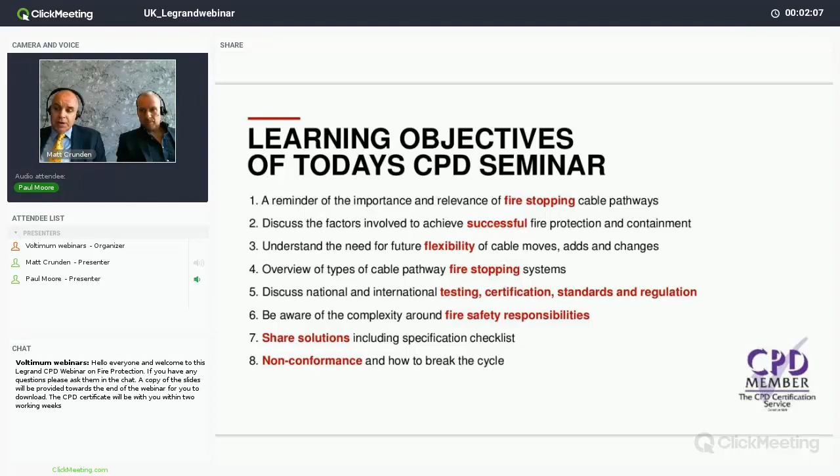The agenda points are shown here, and we'll be talking about quite a broad number of subjects within the seminar, such as fire safety responsibility, cable moves, adds and changes, and a whole host of other things besides.

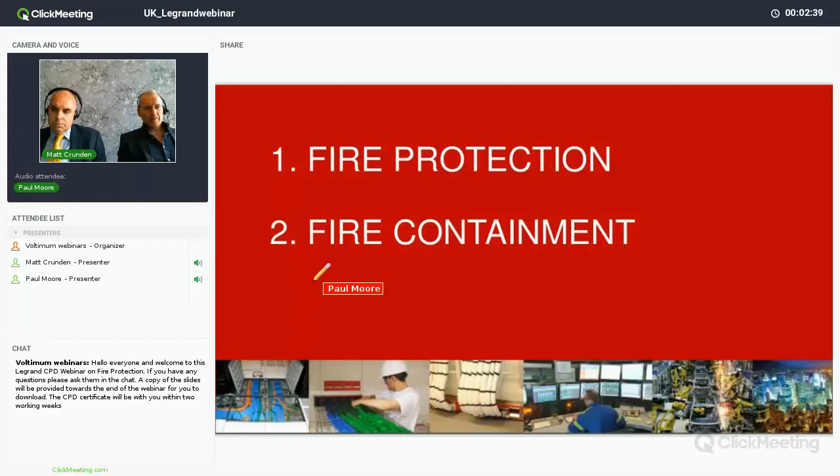We'll start off with sections 1 and 2, fire protection and fire containment. Paul, could I ask you please to give an overview for us of fire protection?

Yes, of course. Fire protection has 3 critical factors. Number 1, prevent: the selection of non-flammable building materials such as bricks, steel tubing and the like. Number 2, extinguish: once a fire is present, the actions required to extinguish it. This is known as active fire protection. And number 3, contain: to prevent the fire from spreading from one building compartment to another. This is known as passive fire protection.

Excellent, Paul, thank you. Could you just briefly elaborate on the terms active and passive fire protection? Active fire protection includes items such as bells, sprinklers and extinguishers, things that require motion and response. Passive fire protection, on the other hand, uses a barrier method, such as a fire door or a penetrating pathway.

Let me quickly explain compartmentation too. The basis of compartmentation is to subdivide buildings into areas of manageable risk, which provides an adequate means of escape, but also provides fire separation for adjoining buildings. Compartmentation is in fact referenced within the Building Regulations Approved Document B for fire safety. In essence, for a building to function, services need to pass through fire-rated barriers.

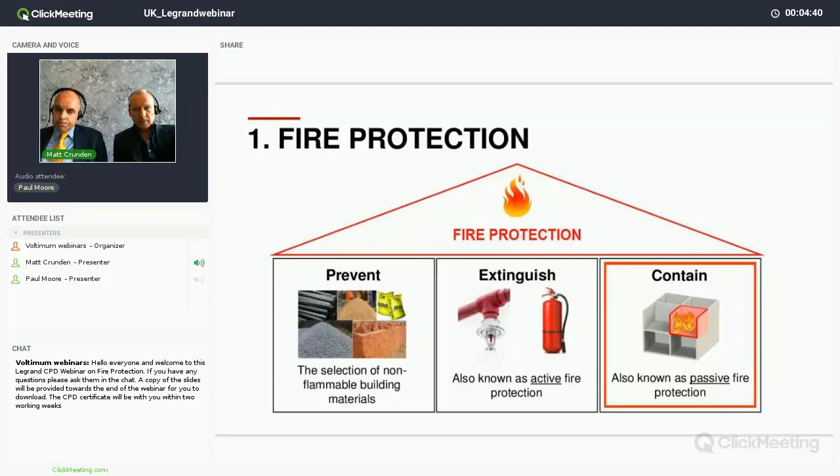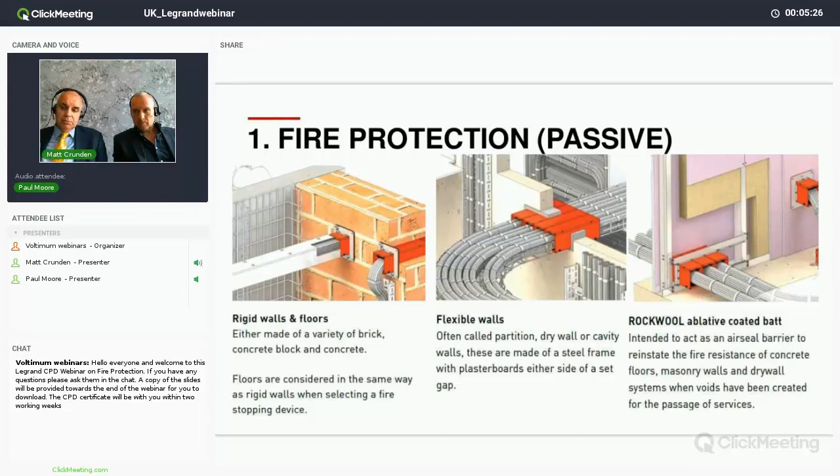Right, thank you for the explanation on that, Paul. However, before choosing a fire-stopping device, it's vital to understand the requirements of the building it will be installed in. Firstly, it's important to be aware of the construction of the building and the areas within it. This is easier with a new build, as walls etc. are shown on drawings or within a model, but it can be a little more complicated with existing buildings. The type of wall or floor used has a bearing on the fire stopping device that you can use and will determine the fire rating, for example, 30 minutes, 60 minutes, 90 minutes, or 120 minutes.

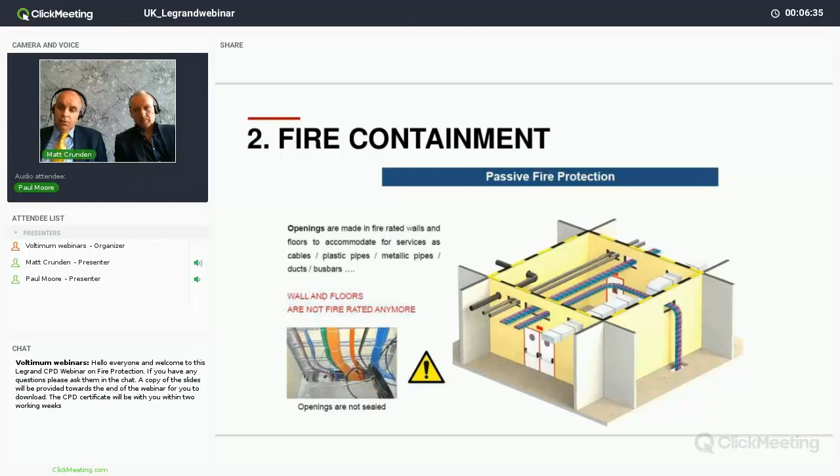Okay, so in terms of the openings in the walls and the floors, how do we restore the resistance of these walls and floors?

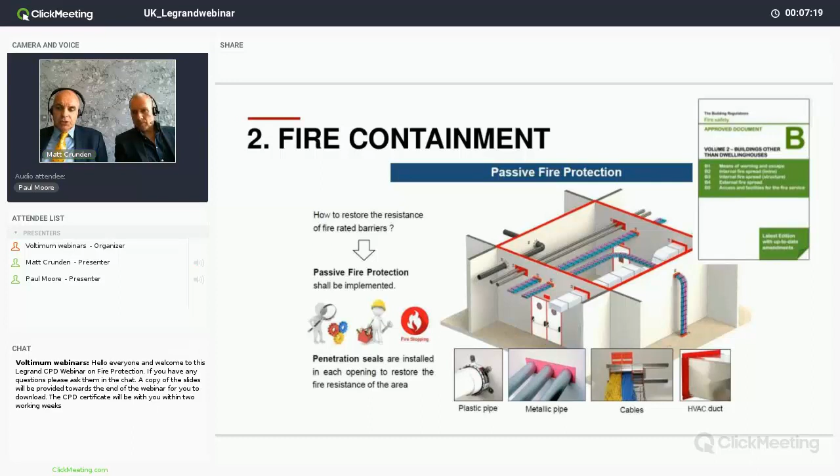With the use of passive fire protection materials in accordance with Building Regulations Part B, section 10.2, which states the following: if a fire separating element is to be effective, every joint or imperfection of fit or opening to allow services to pass through the element should be adequately protected by sealing or fire stopping, so that the fire resistance of the element is not impaired.

Using passive fire protection methods ensures that in the case of fire, the fire barrier or penetration seal stops the flames, smoke and gases from progressing to other areas. Fire is contained, the building is safe.

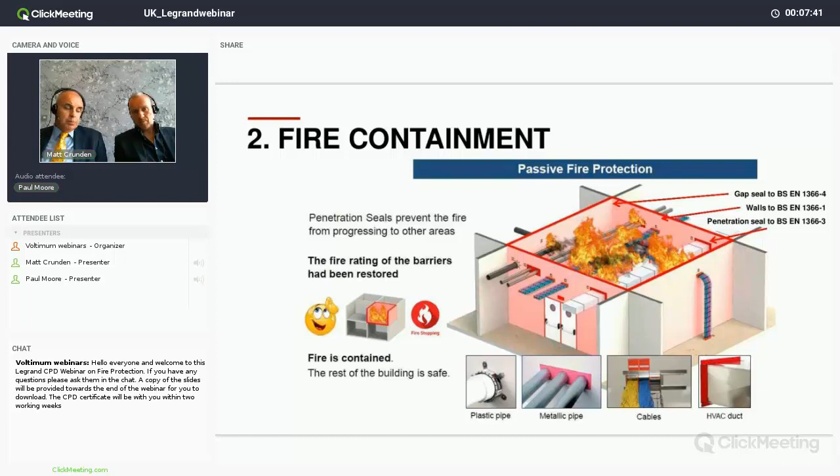We need to ensure that we eliminate the use of incorrect products, mispenetrations, or incompetent people installing fire stopping, because this allows fire to spread quickly to other areas as the fire barrier will have lost its resistance. If openings are not sealed, fire can progress to other areas.

According to the Association of Specialist Fire Protection, fire will spread from one compartment to another in under 4 minutes through a hole no larger than a pencil. Well, that's a frightening statistic.

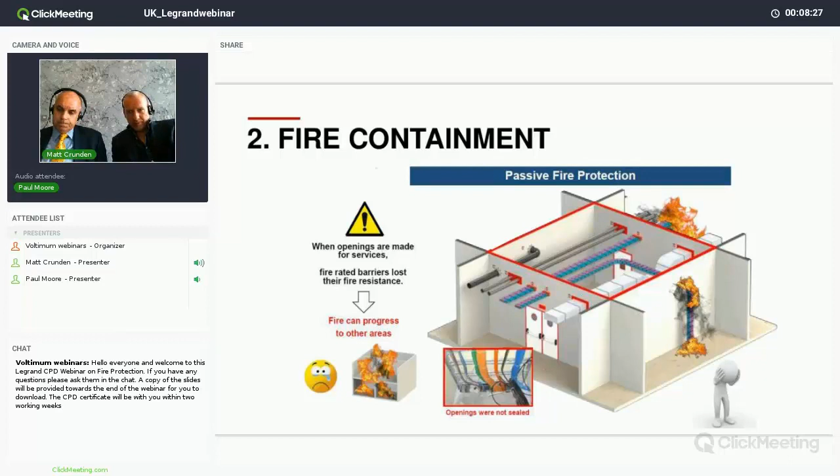Excellent, Paul. Thank you. Let's move to section 3 and we'll talk about fire safety responsibility.

In October 2017, the Royal Town Planning Institute, a not-for-profit organisation representing 23,000 planning professionals working worldwide in the public, private, charitable and education sectors, put together a short briefing to clarify who is responsible for what in England. The Building Act 1984 tasks building control with securing the health, safety, welfare and convenience of persons in or about buildings and of others who may be affected by buildings or matters connected with buildings. This includes fire safety. Fire safety is part of building regulations, so building control plays the main role in approving fire safety in developments.

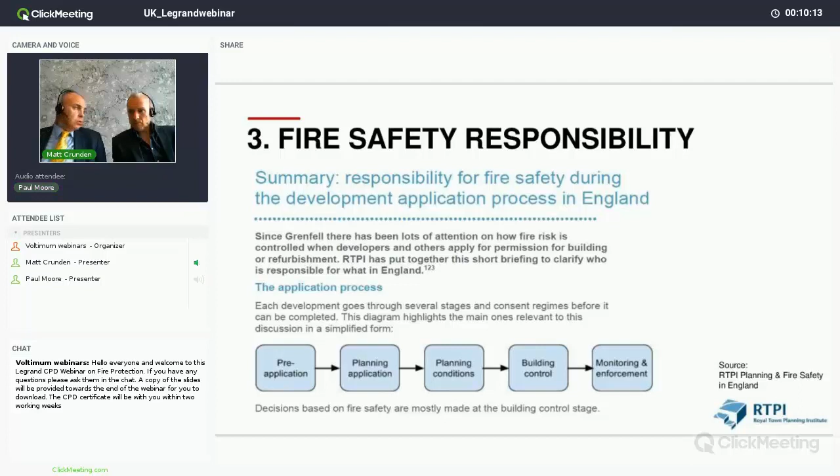However, whilst legal responsibility for assessing fire safety during development lies with building control, other systems, including planning, have roles to play too. The document sets out the respective roles and limitations in scope of each key player in this process, starting with planning. Note, this is advisory only and should not be taken to constitute legal advice.

Okay, so let's briefly examine Dame Judith Hackitt's review of the building regulations, which was ordered after the Grenfell Tower disaster and has found the system, to quote from the report, 'not fit for purpose.' Yes, Dame Judith Hackitt's interim report into building safety has called for an overhaul of the construction industry to put safety above cutting costs. This interim report will be followed by a full report, including her recommendations, expected in spring 2018.

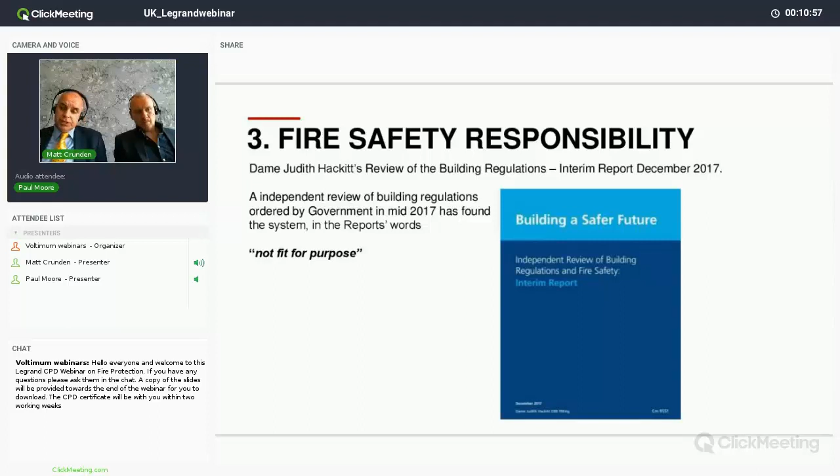Matt, look at this map and tell me what you see, if you can see it. Oh, I see a very complex mess. And I, for one, having actually spent some time trying to understand this, have failed.

Exactly. You don't need to see the slide or understand what's on it, but the map highlights the building and fire safety regulatory regime. This was produced in Appendix D as part of Dame Judith Hackitt's interim report in December 2017. You do not need to read the text or fully understand it. I just want you to contemplate the complexity of the existing regulatory system she has identified.

The purpose of the independent review of building regulations and fire safety is to make recommendations that will ensure we have a sufficiently robust regulatory system for the future, and to provide further assurance to residents that the complete system is working to ensure the buildings they live in are safe and remain so. It is examining the building and fire safety regulatory system with a focus on high-rise residential buildings. This interim report provides the findings to date and directions of travel for the review, ahead of a final report expected later this year.

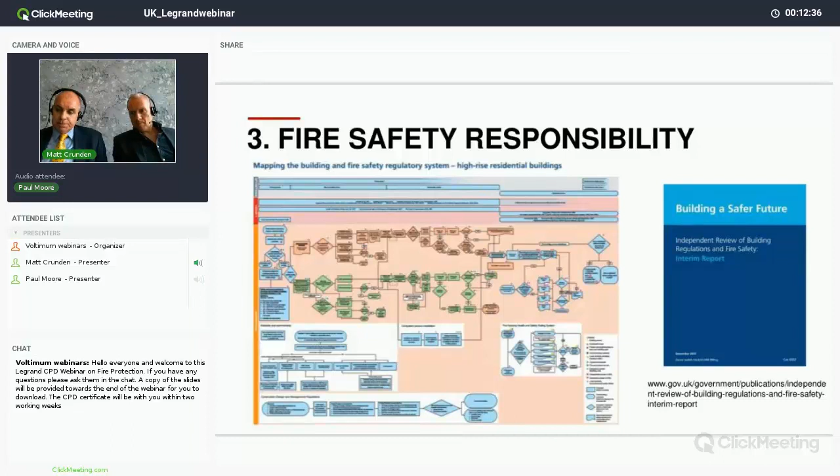Thank you, Paul. So let's move to section 4, cable moves, adds, and changes.

Okay, so Paul, I have to ask you, other systems we know pass through walls and floors. So why should the fire stopping of the CMS system, the cable management system, be considered separately from other systems? Good question. Because unlike pipe or ducting, the cables on a cable support system can provide a source of fuel to propagate a fire and can also release toxic smoke and gases.

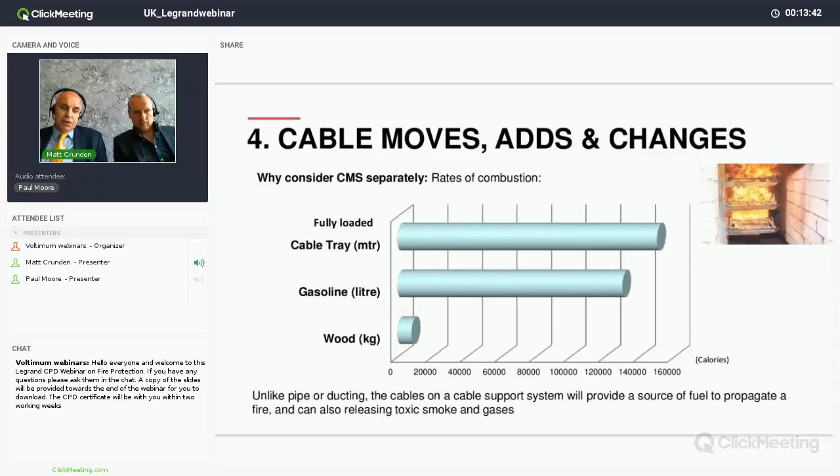You can see from the graph that a rate of combustion comparison between 1 metre of fully loaded cable tray, 1 litre of gasoline, and 1 kilogram of dry wood is not at all favourable for the cable.

Due to cabling being such a good source of fuel, passive fire protection is a critical factor in any electrical, data, telecom installation. Because expansion of electrical or data infrastructure in a building is so frequently undertaken, it is the most likely source of breaches in fire stops or unprotected new penetrations of fire barriers. Some of the cables present will likely be designed to withstand fire, but uncontained, represent a danger and a potential loss of life to those trying to extinguish it.

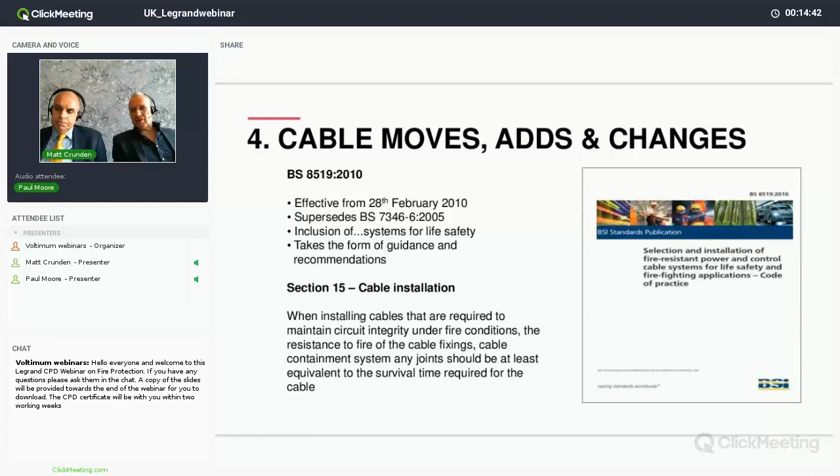The BS 8519:2010 came into effect in February of that year and covers the selection and installation of fire-resistant power and control cable.

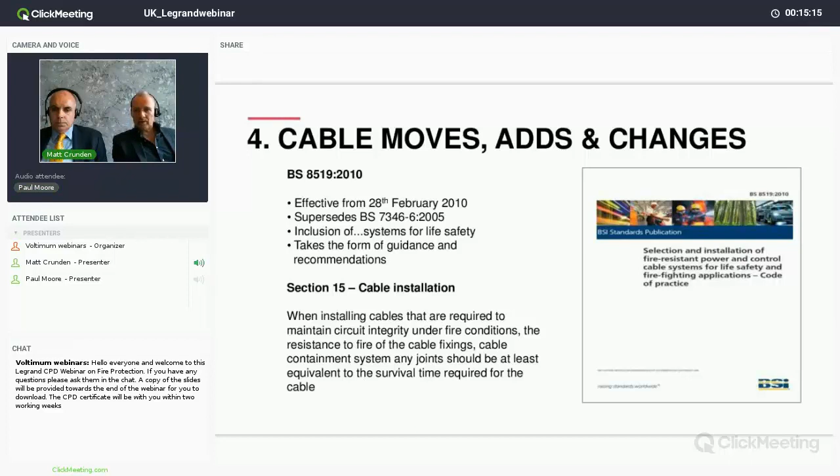Section 15 focuses on cable installation, which we've highlighted here on the screen. And just to quote quickly from the standard: when installing cables that are required to maintain circuit integrity under fire conditions, the resistance to fire of the cable fixings, cable containment system, and any joints should be at least equivalent to the survival time required for the cable.

From the 1st of July 2013, under the Construction Products Regulation, CPR, it became mandatory for manufacturers to apply CE marking to any of their products covered by a harmonised European standard, a hEN, or a European Technical Assessment, an ETA. This was a major change in the United Kingdom, as affixing CE marking under the old Construction Products Directive, CPD, had been voluntary. This, coupled with other changes introduced by the CPR, left the construction industry facing its most significant change for over 10 years in how construction products were sold in Europe.

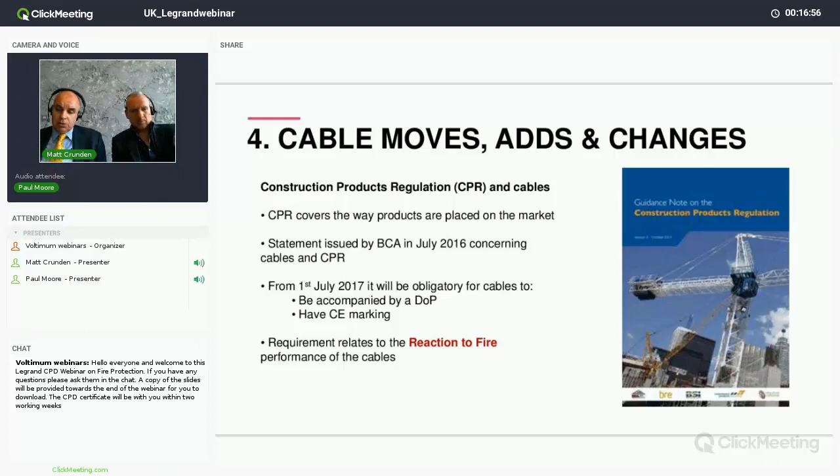With careful preventative measures in accordance with the CPR regulation, fire propagation, the lack of visibility in smoke-filled rooms, and the diffusion of corrosive and toxic gases can be reduced or almost totally eliminated.

As part of the features considered important for the safety of constructions included in the CPR, the European Commission has considered a cable's reaction to fire and resistance to fire, recognizing the importance of their behavior and role in fire situations. The release of harmful substances is one of the performances considered important for cables, although at present no minimum levels of performance have been established, because when used normally, cables do not release harmful substances.

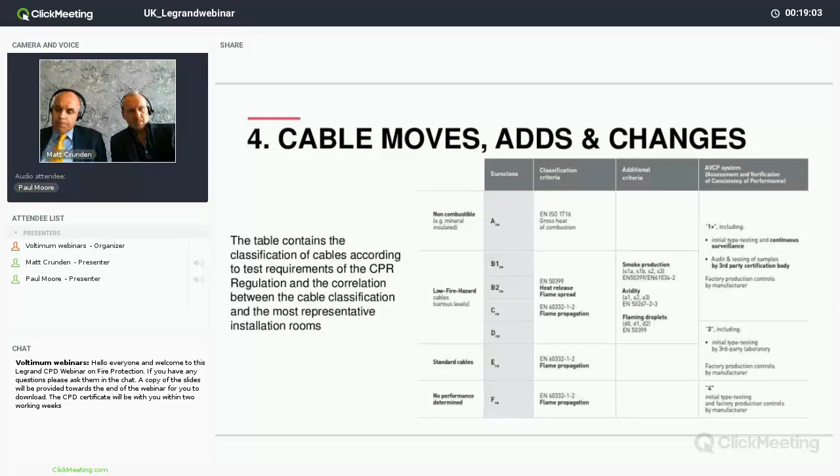As well as understanding the regulatory landscape, an important consideration when fire sealing a compartment is to think about future flexibility. Working environments are often changing and evolving, and this brings its own set of factors to consider.

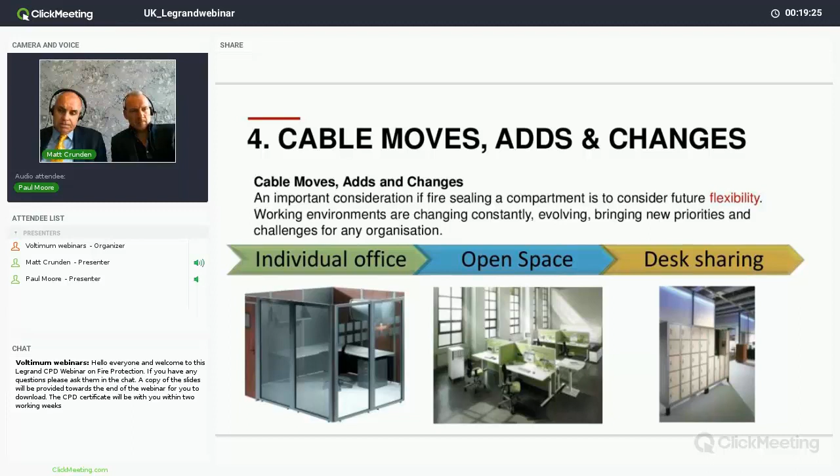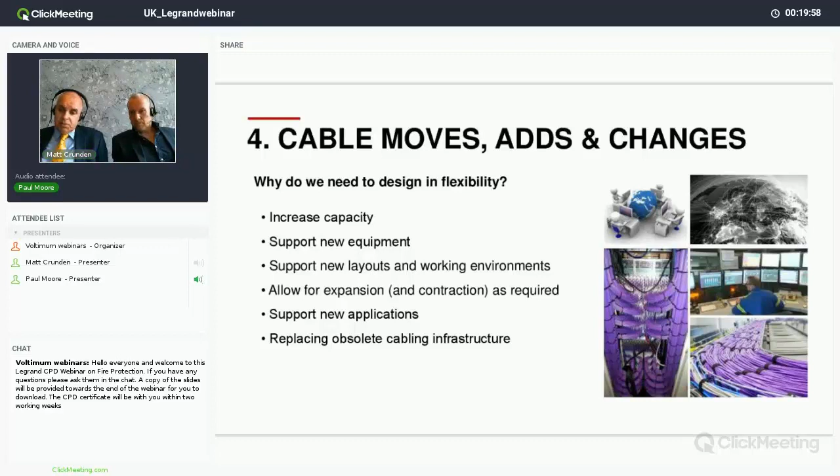Okay, so there's a question we're asking on the slide here, Paul. Why do we need to design in flexibility? So what could you tell me about the importance of that? Well, there's half a dozen requirements here on the screen. Increases in capacity, for example, as business needs change. Extra personnel can force new layouts or new equipment, as can diversification into new markets.

But I guess there are also some associated problems as well. Yes, that's right. Business operation can be disrupted, including critical organisations such as hospitals, where noise from drilling and the associated dust and debris may never be considered acceptable. Areas often need to be emptied to allow works to take place, and this leads to inconvenience to tenants, staff, patients, the public.

There's also the risk associated with the removal of fire stopping, which is often done in order to carry out works. How long is acceptable? And then there needs to be a process in place to confirm the fire barrier has been repaired and made up to a compliant level.

Another challenge is competency. How do we make sure the installer is competent? And how can we measure competency?

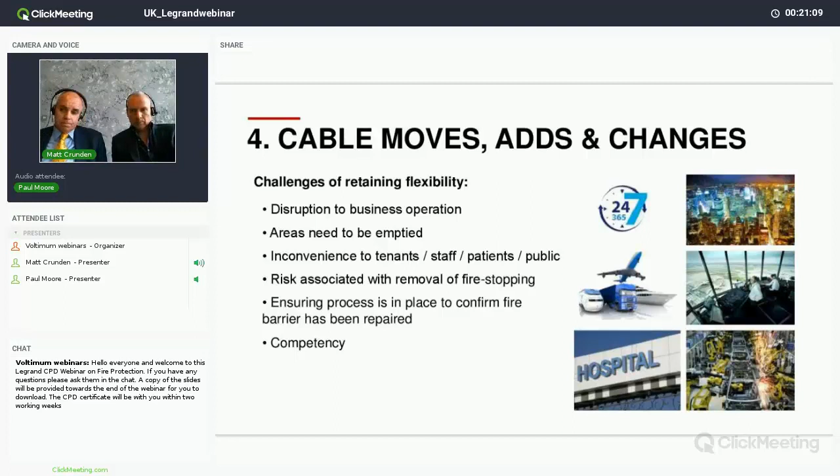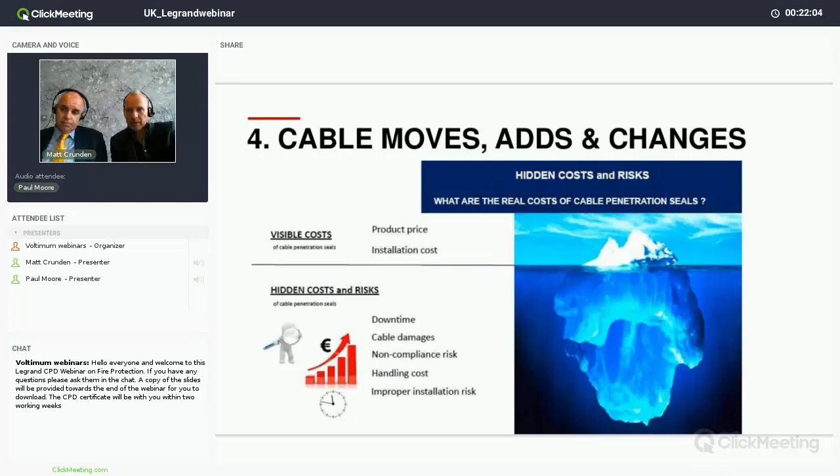Downtime, cable damages, non-compliance, handling cost, improper installation risk, and that's just a small selection of the potential risks one might find. Absolutely, Matt. And here's a little example from downtime through to improper installation risk, as we can see on those points there.

Section 5, types of fire stopping systems. Let's have a look and see what's out there.

So, now we have discussed what a cable pathway fire stop is to do in essence, but what kind of systems are available? There are a number of different fire stopping systems available to the specifier, which are readily available through the supply chain and have been used for many years.

Where services will perhaps never be added to, for example incoming services or water pipes, these are absolutely fine and effectively form part of the building fabric.

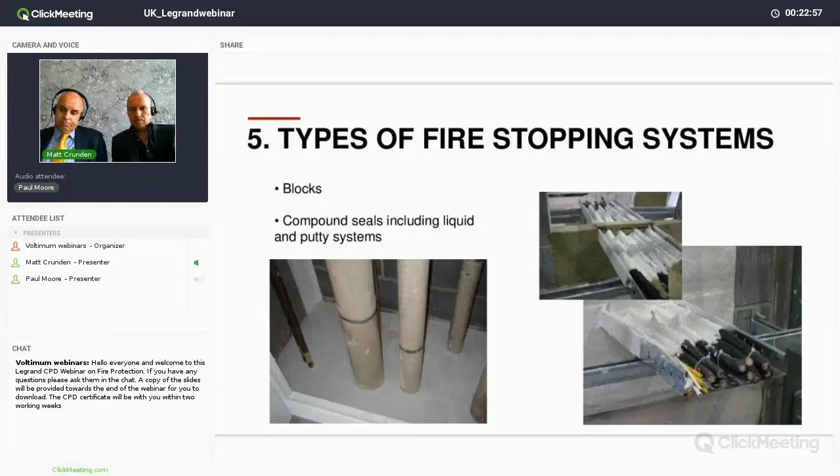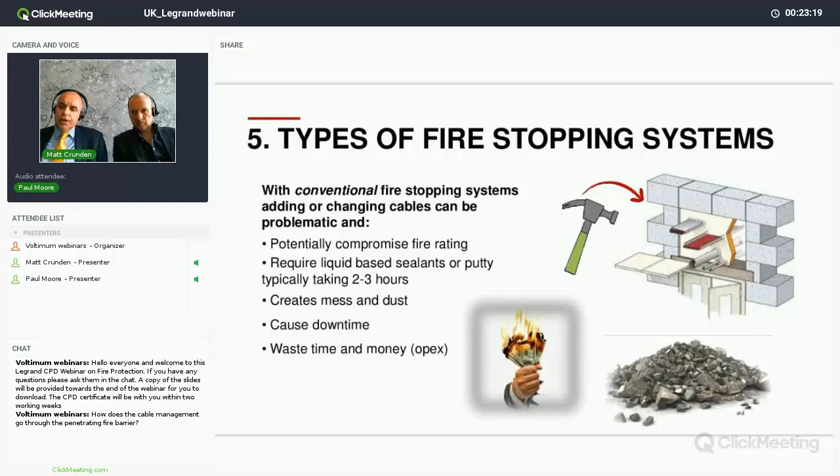With conventional fire stopping systems, adding or changing cables can be problematic, and as well as the points on the screen, if a fire barrier is breached, then the building is at risk until it has been repaired. Also remember that each addition to the cables incurs extra costs.

Muffins, pillows and collars are all readily available, fairly easy to install, and can appear to offer a certain degree of flexibility, although they're not always the most cost-effective solutions.

Penetrating pathways are a flexible and most cost-effective solution that meet fire stopping requirements in all market sectors, where passive fire protection is required, from data centers, which have significant cabling requirements, to multi-dwelling units with single cable requirements.

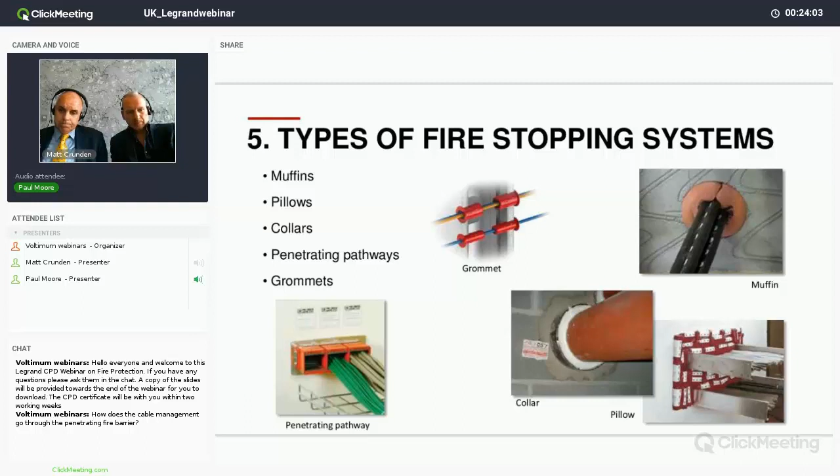Whether a building is brand new, a head office for a corporation, designed for multi-occupation or nearing the end of its usable life, or required to function 24 hours a day, such as a hospital or a data center, there will be a demand from the occupants for cable addition, especially data or telecom, on a very regular basis. It'll often be necessary for these items to pass through the fire-resistive floor or the wall.

Yes, and in order to accomplish this, cables are often added to the existing cable management system, and oversized openings are cut or drilled through alongside the existing fire stops. Cable additions often result in the removal and reduction of the fire stopping materials.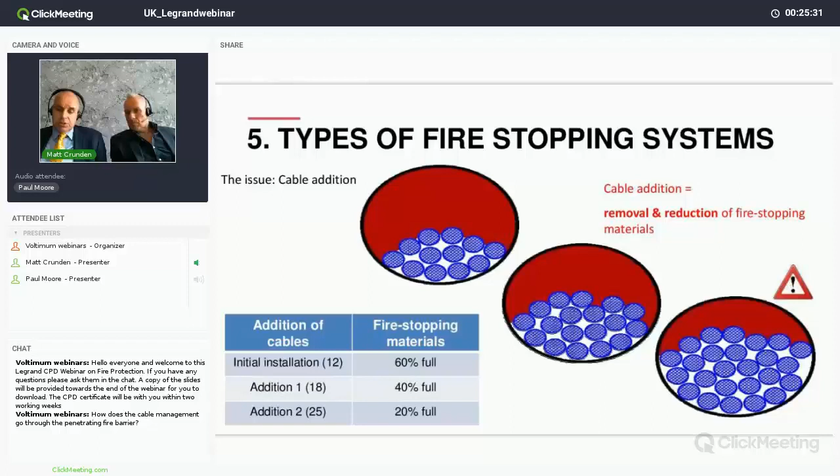Our example shows the original installation has 12 cables, maintaining the approximate fill level of fire stopping materials at around 60% full. Addition 1 increases the cables to 18, but reduces the fire stopping to around 40% full. Addition 2 adds another 7 cables, but because the penetration is still the same size, the fire stopping reduces to around 20% full, which could well be considered to be compromised.

So, to maintain an adequate level of fire stopping materials when adding cables, we actually need an increase in penetration size to make sure the ratio is maintained. Another option would be to use cable penetration seals, which we can take a look at now, in section 6.

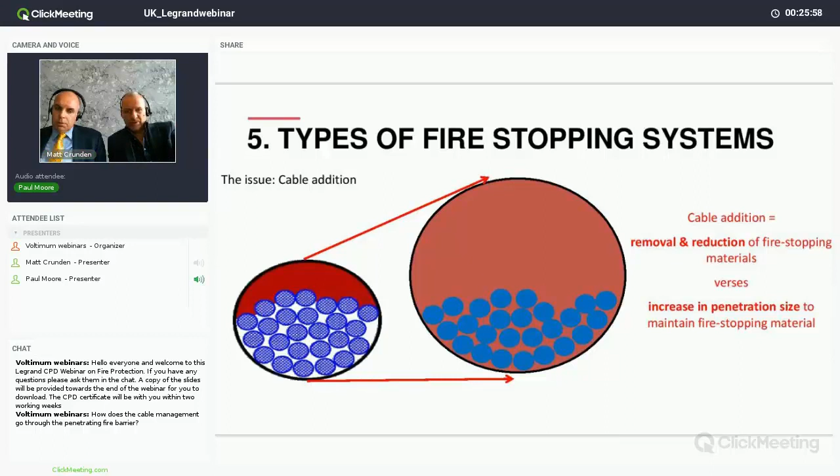Cable additions in modern systems also leave no mess or dust and also cause minimal downtime, with typical installation taking just a few minutes.

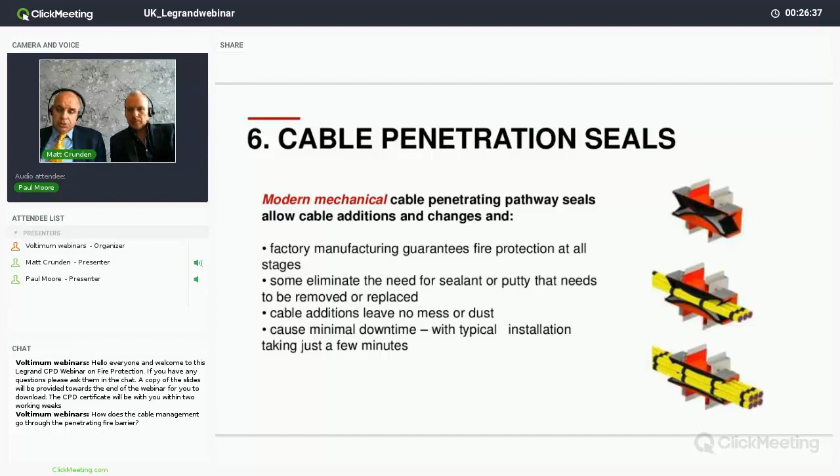Some allow retrofit, which helps to save on operating expenditure, and there's no need to call out a specialist to repair, whilst also offering no gaps in protection. Future expansion or cable additions can be factored in at design phase. The BS 8519 2010 calculation can also be done at the design phase.

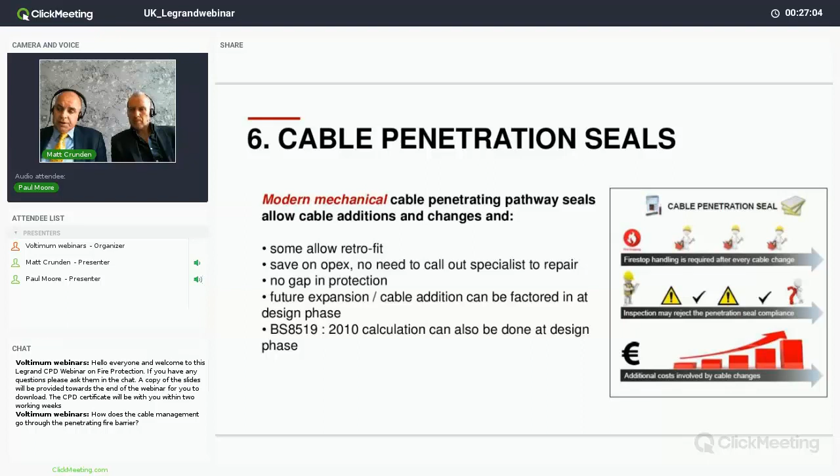Some cable penetration seals also have 3D BIM files available, which can help with design and analysis.

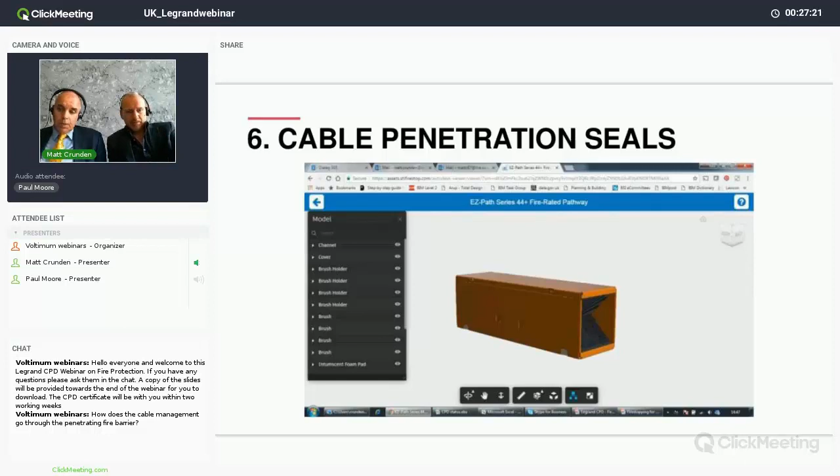So, Paul, explain to me, please, how a penetrating pathway would work.

The devices contain intumescent material within a metal container. They are designed to allow cables to be added at any time and reseal either automatically or manually to restore the fire stopping capability. In the event of a fire, the intumescent material expands and seals the penetration, which prevents fire from spreading through the compartmentation.

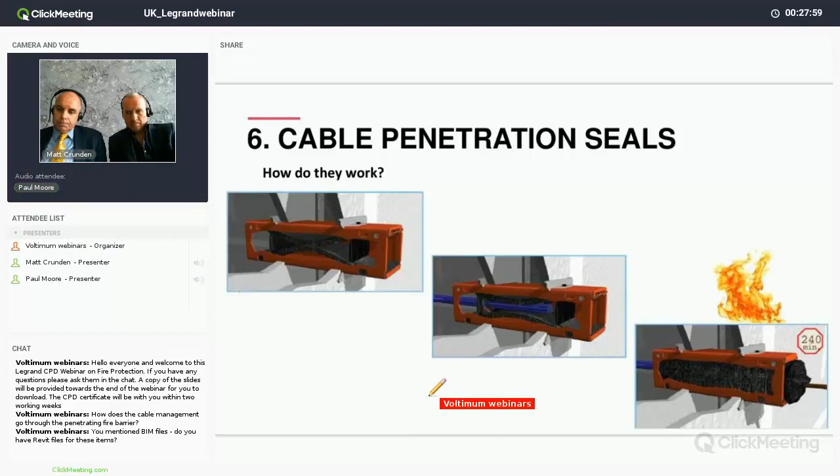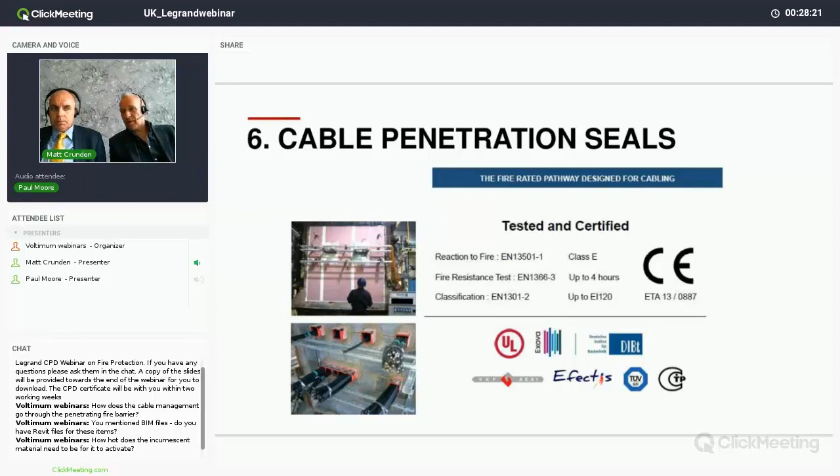These are some of the standards, regulations and testing relevant to a fire stopping system. Note the testing and certification, and note also the two photographs. On the other side of the wall is the inside of the test oven that would be constructed to run the tests on the fire stopping products.

Okay, so the fire side is tested for integrity, which is E, whilst the non-fire side undergoes a thermal test, which is the I rating. The integrity E rating is likely to remain consistent however the device is used, but the thermal I rating will change depending on the type of cable used and whether the device is installed horizontally or vertically.

It's important to check the certification of the device to ensure it offers at least the same EI fire rating as the fire rated wall or floor being penetrated when installed with the cable load of your design.

In terms of descriptions, fire class E or fire resistance class E integrity demonstrates the ability to prevent the passage of flames or hot gases through the module, when exposed to fire on one side, and to prevent the occurrence of flames on the unexposed side.

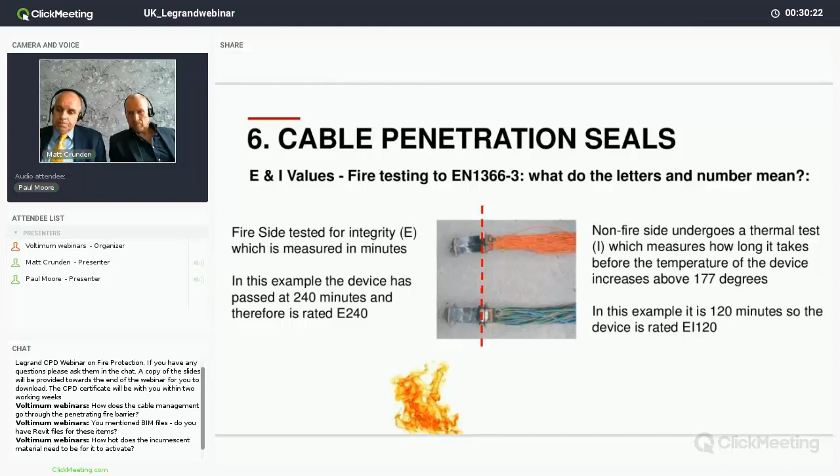Excellent, thank you, Paul. So section 7, entitled Checklist.

With potential concerns raised over current building regulations, and we've already explored two elements there from the Royal Town Planning Institute and the Dame Judith Hackitt review. What do we need to consider when specifying a fire stopping system for a cable pathway between compartments?

Well, we'd like to offer a checklist as follows. Consider possible installation issues such as speed and quality of workmanship. Consider how to minimize the potential of poor installation and need for detailed invasive inspection. Consider requirements for future and ongoing maintenance and regular inspection.

Future flexibility, choosing a system that automatically adjusts to the number of cables installed, ensuring fire protection with every new or retrofit installation. Specify a proprietary product, ensure it is fully compliant with all standards and testing, including BS 476 Part 20 and EN 1366-3.

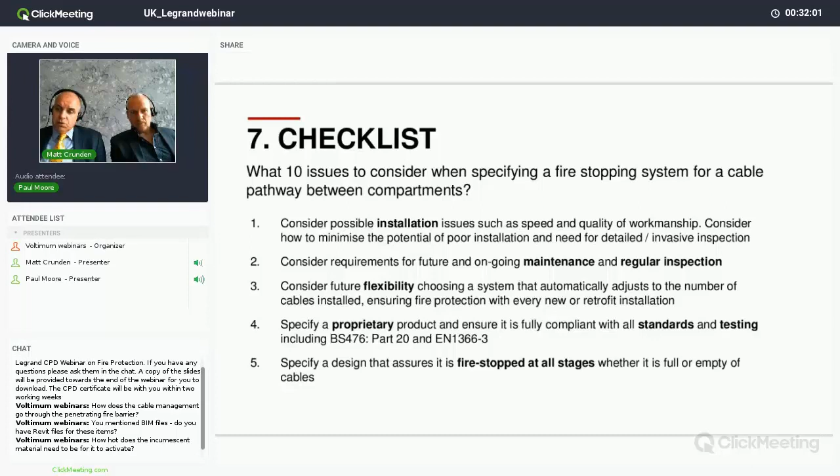Specify a design that assures it is fire stopped at all stages, whether it is full or empty of cables. Does the system meet the fire rating requirement?

For buildings running 24/7, consider a system which reduces noise and debris. Consider a system which removes any handling or removal of fire stop material. And look at the acoustic issues between compartments, 45 decibels and above. Consider a system that can maintain segregation to ensure electromagnetic compatibility.

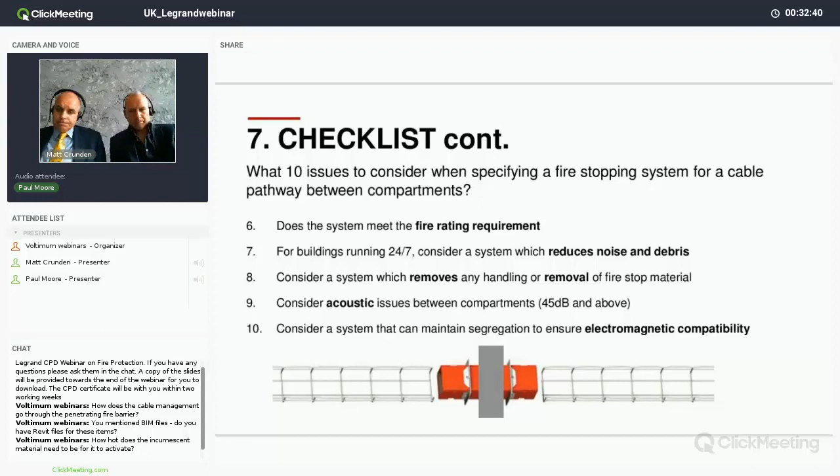Shown here on the next slide are some good examples of fire stopping. The cables are neat and tidy, gaps are sealed, and visual inspection can be carried out easily.

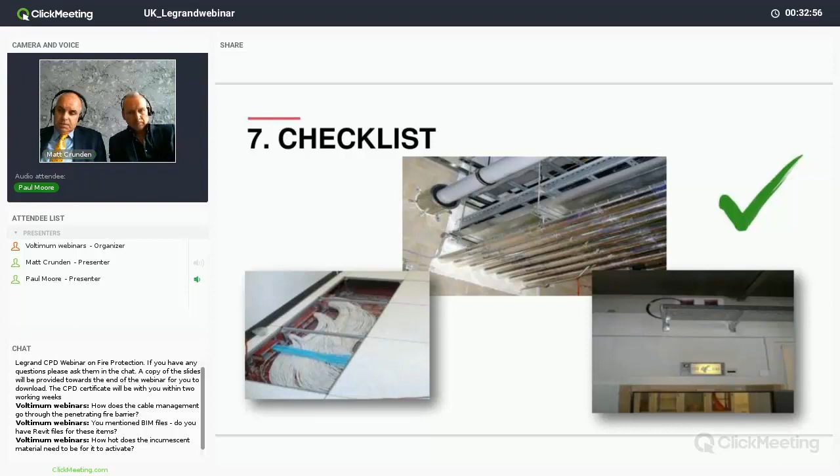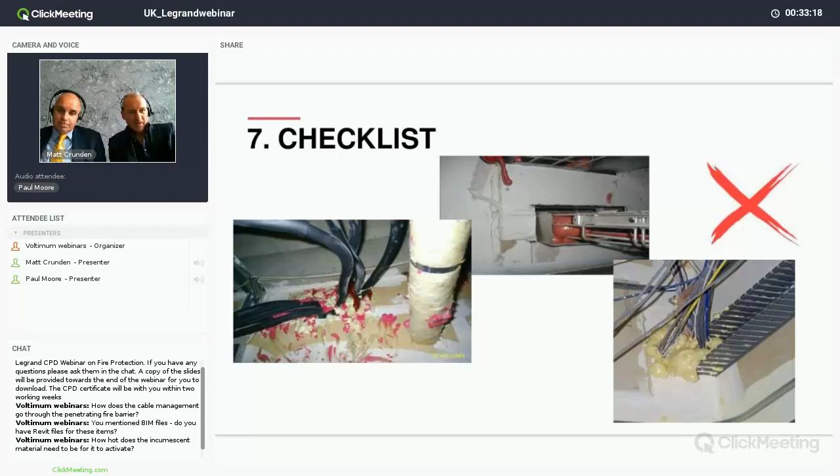And on the next slide, some that are not so good. Paul, seriously? They're all actual installations, believe it or not. Okay.

With those last two slides in mind, let's look at some standards and regulations.

New Wiring Regulations 2018. The draft for public comment closed near the end of August 2017, and the joint IET BSI subcommittees are reviewing all the comments which have been made. The latest revision of the IET wiring regulations, BS 7671, the 18th edition, comes into full effect in January 2019.

And these are some of the relevant standards and regulations covering the seminar subject today.

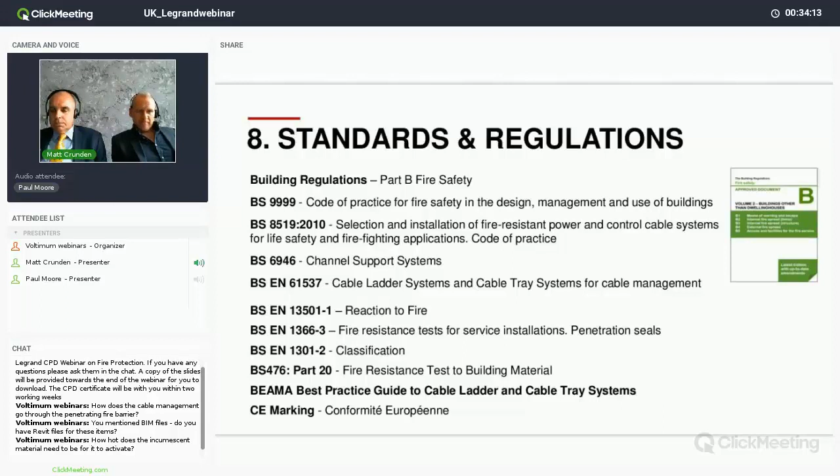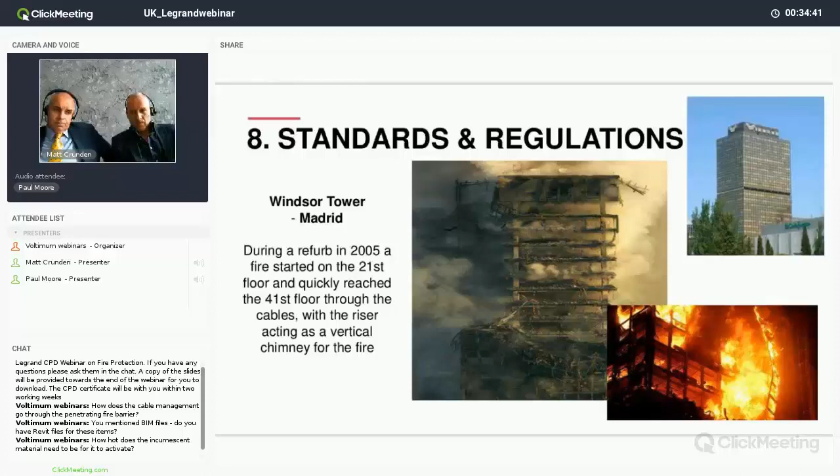This was a cable fire, I believe. Yes. Okay.

Section 9, the summary, followed by 10 and 11 for the learning and the Q&A.

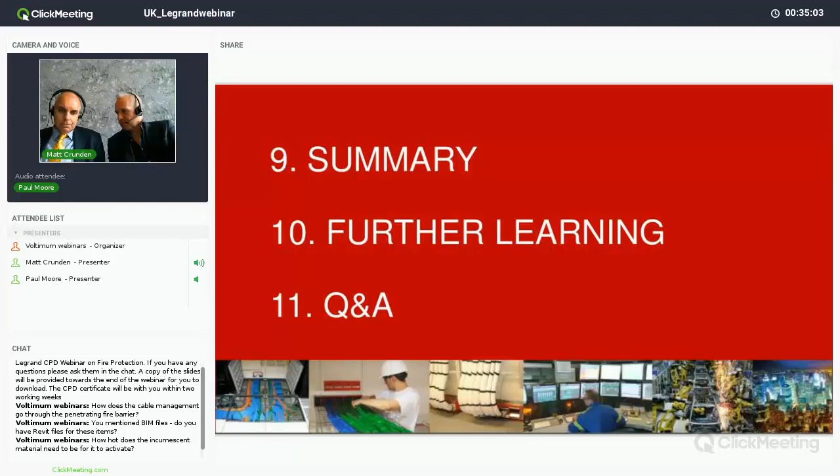Paul, I'm bravely going to pass the summary to you. Thank you, Matt. We should now have a good understanding of the importance and relevance of fire stopping cable pathways, as we've spent some time discussing the factors involved in order to achieve successful fire protection and containment.

Cable moves, adds and changes, or MAC, can be problematical, as we've demonstrated, but we should now be able to understand the need for future flexibility.

Different types of cable pathway fire stopping systems exist in the marketplace and can be identified relatively easily. We've given an overview of national and international testing, certification, standards and regulation, and also taken a look at the complex nature of fire safety responsibilities.

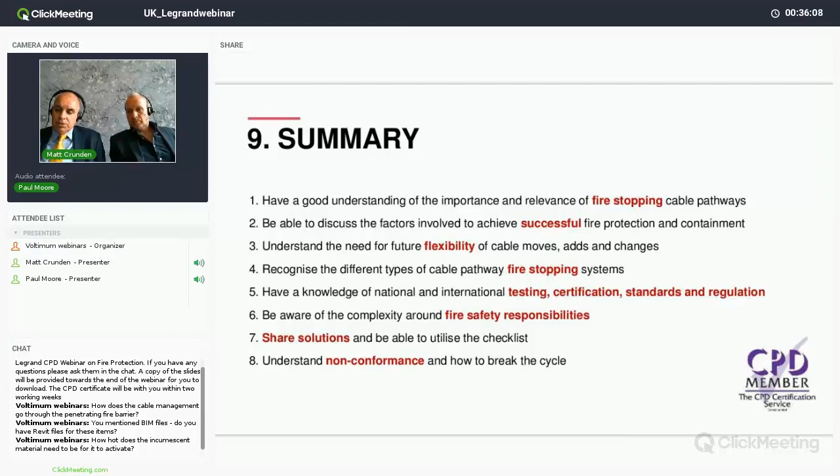This will change in the near future once Dame Judith Hackitt's final report is published. Sharing solutions is one of the best ways to learn best practice and will help us all to understand non-conformance and how to break the cycle.